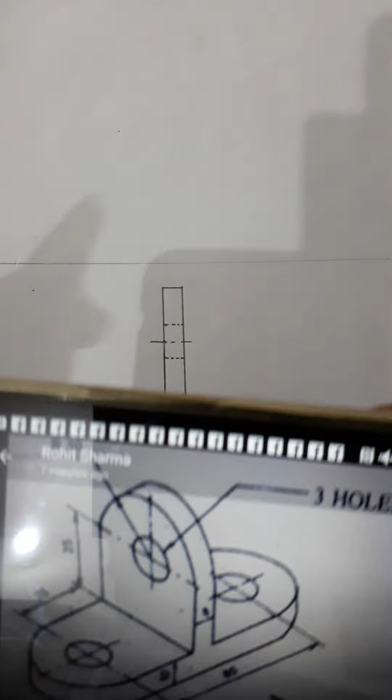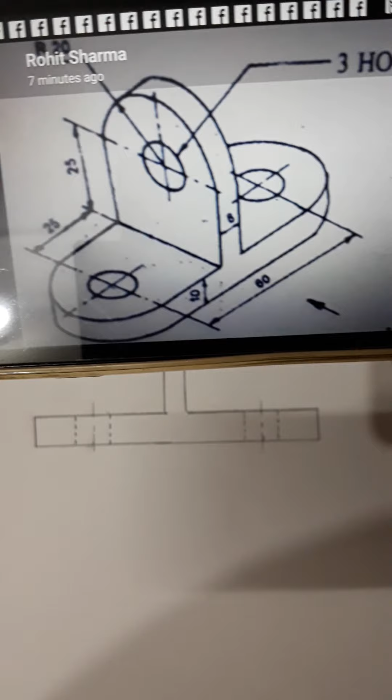Now I will draw the top view of this. The front view we have drawn, so it is drawn. Now in the top view, what you will see? You can see again this 100 mm dimension, 60 plus 20 plus 20, and one more thing you can see, one other dimension is the depth. That depth is here, you can see. So the depth here, its radius is 20, then 20 plus 20 will be 40. Okay, now I will be drawing.

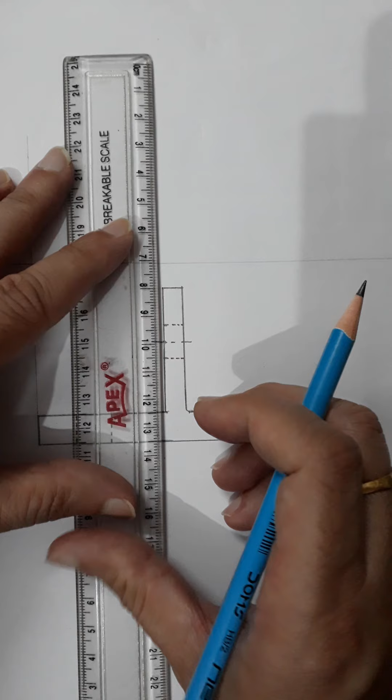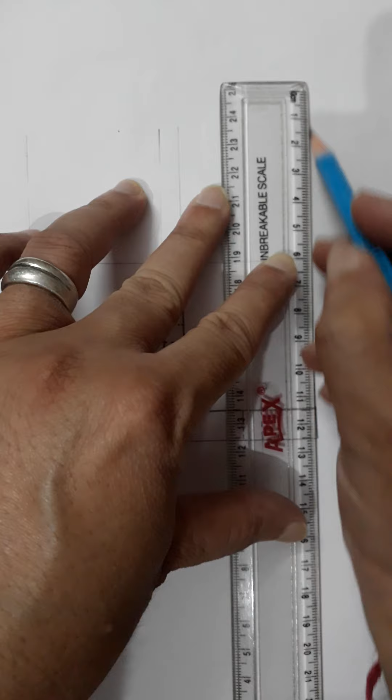I will first be projecting it upward, above the xy. Draw the vertical projectors through this, as usual we have been doing. Now I will be drawing the top view above xy. These are the vertical projectors that will be useful while drawing the top view. You can also extend this center line so as to find out the center of the hole. You can also extend these center lines, because you have to make the holes as well in the top view.

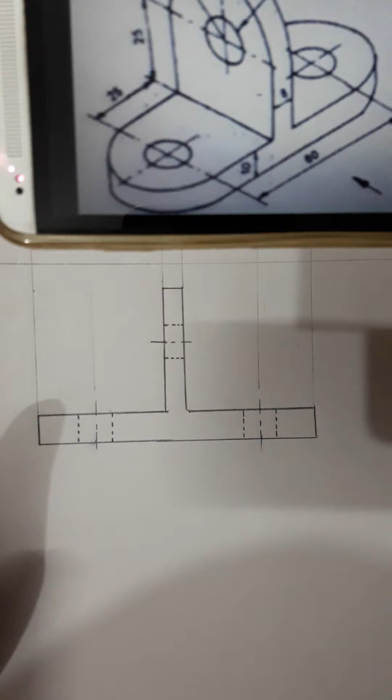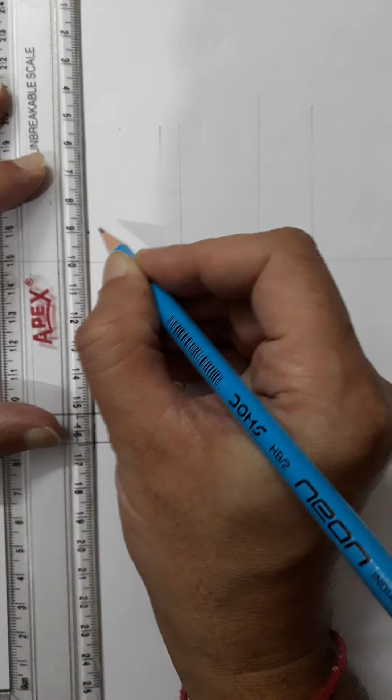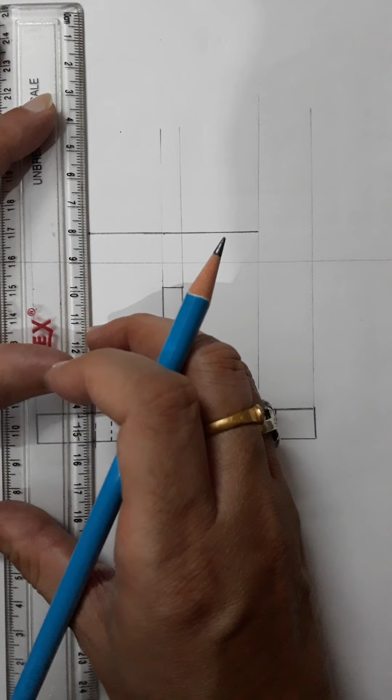Now in the top view it will be again 60. First you have to mark 60, and then there will be two radii on both sides, 20 mm both sides. First it is 60 mm. Again you can take this 10 mm above this xy. So I am marking here, this is 10. Now you can mark this 60 mm horizontal line. So this is 60. Next you can take the 40 mm, 40 mm both sides, because its radius is 20, so it will be 40 mm, double of this. Then you can join this horizontal line.

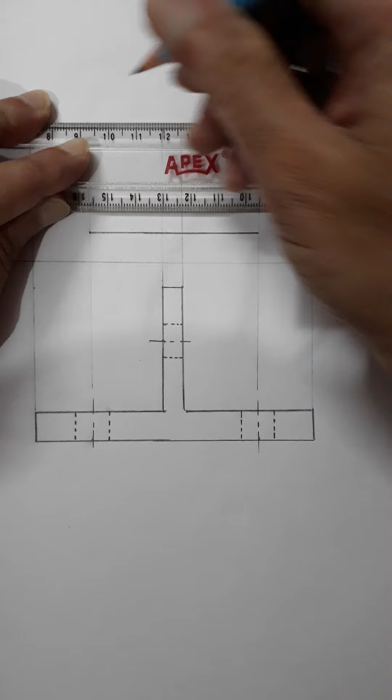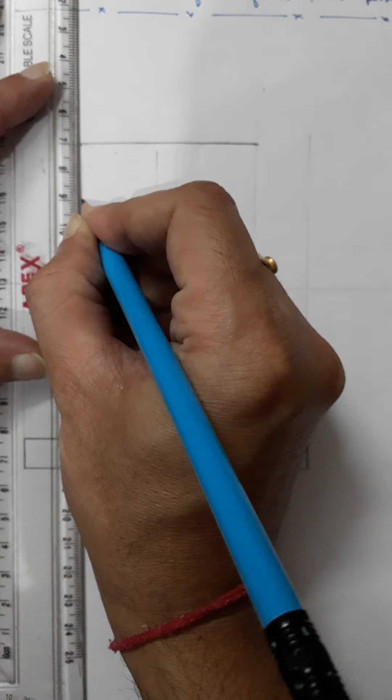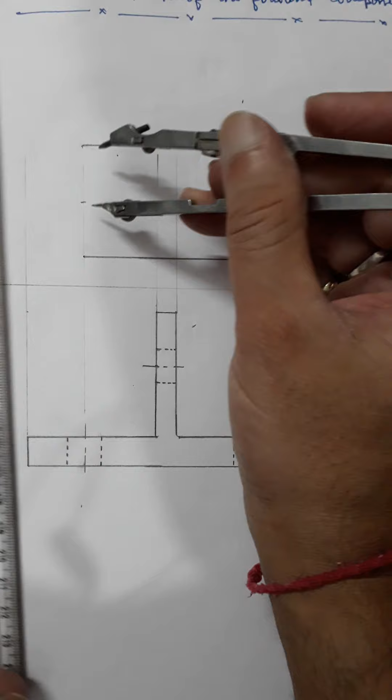Then you have to use the compass here. With this center, you can find out the center here. It will be 40 by 2, 20. You can draw this radius 20. You can draw another arc of radius 20. Simply you can take it from here as well, so it is 20. Okay, it is complete. Similarly, you can also do it on the other side. Just I am checking. Yes.

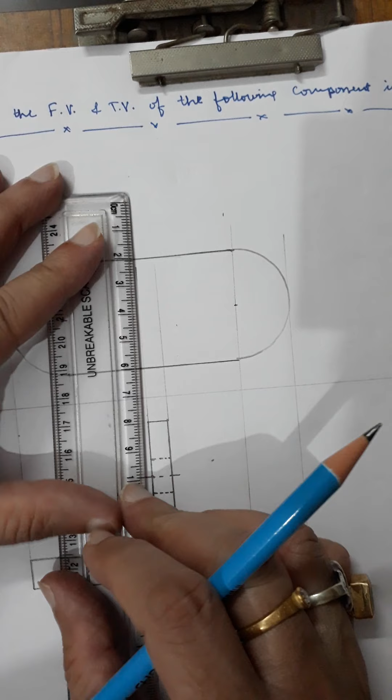And then there will be the inner slot. In the top view, yes, the 8 mm slot will also be there. You can see here the 8 mm slot that will be flat. It will be continuous thick. So this is the 8 mm slot, and then there are two circles now of 12 mm diameter.

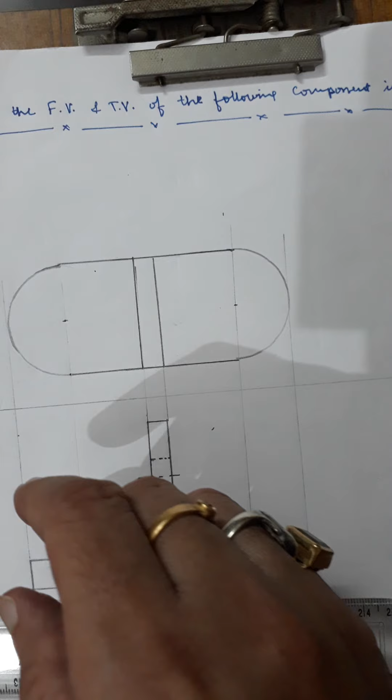Now I will draw two circles of 12 mm diameter, which means 6 mm radius. So I will take 6 mm radius. And then again it will be 6 mm on the other side. I'm drawing 6 mm.

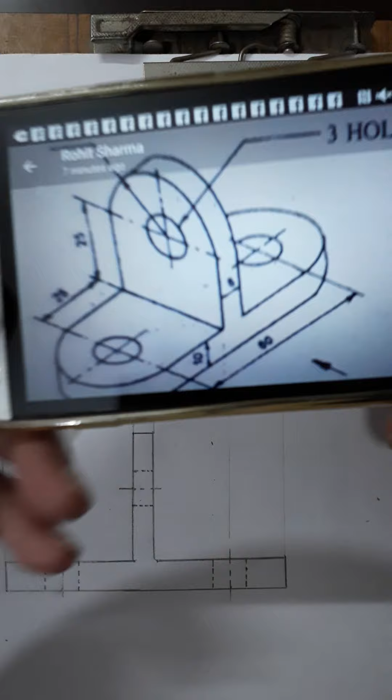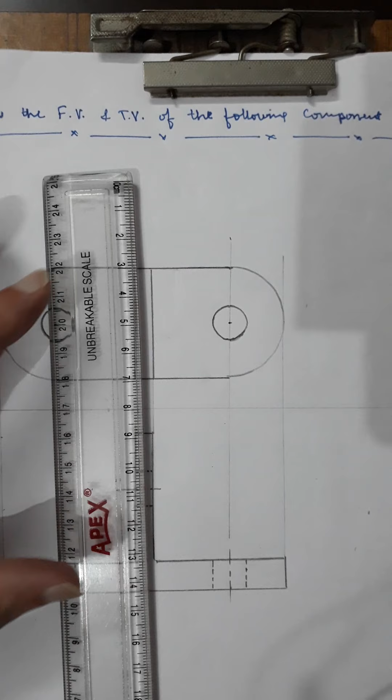Now you can see there are two circles, and one third circle is also there that is not visible. So this third circle will be hidden. That will be 25 from the base and 20 in the top view. It will be in the center, of course, and it is 20, and in between the center line is there. Then you have to draw a 12 mm slot. It will be cylindrical in shape.

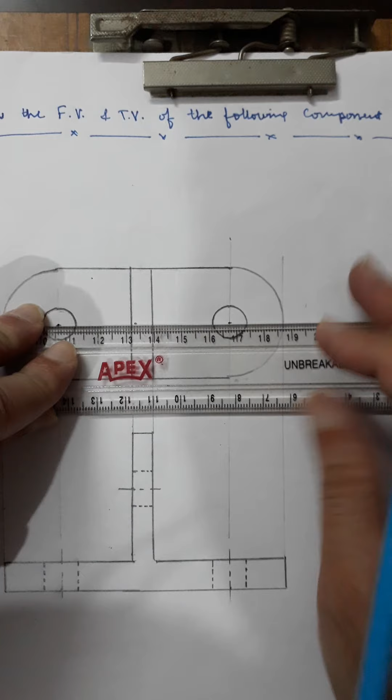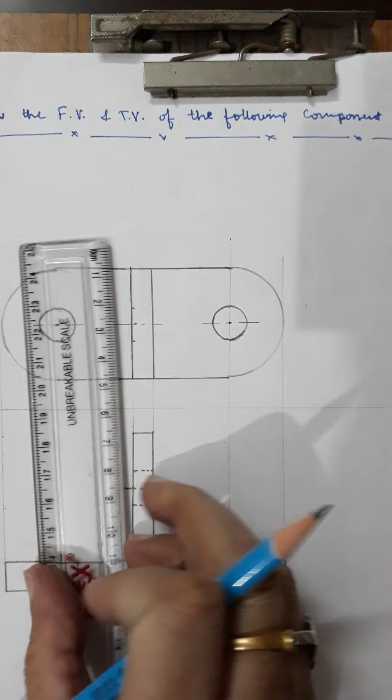Now you need to draw the center line through all these circles. It is 12 mm, so you can measure 6 mm on both sides. Then you can draw the dashed lines because it is hidden. This circle is hidden in the top view. Now this is the complete top view.

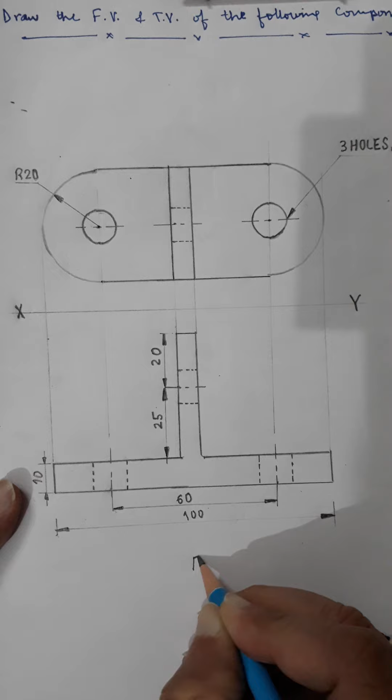Now I will be doing the dimensioning only. So I have done the dimensioning as well. You can also add that this is third angle projection. You can write front view here, below xy, and the top view is here above the xy line. I am using the aligned system of dimensioning, so you can check. I think all the dimensions are there. Thank you very much. I hope you got it.